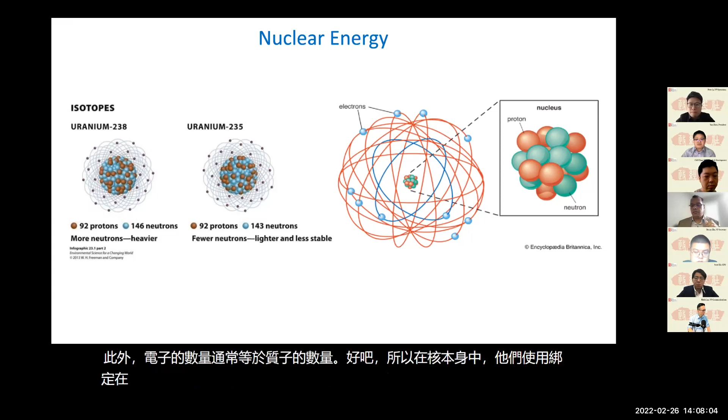In the nucleus itself, protons and neutrons are bound together using nuclear energy. We are going to manipulate that energy in two nuclear reactions. In general, there are two nuclear reactions known to us: one we call nuclear fission, and the other we call nuclear fusion.

In nuclear fission, what we do is break a uranium-235 atom using what we call slow neutrons.

The neutron is moving slow compared to fast neutrons. So what happens now is this neutron gets absorbed into a uranium-235 nucleus, it becomes unstable, then it splits into two, releasing energy as well as 2 to 3 neutrons. These neutrons will eventually travel through the medium, reduce its energy, and become available to continue with the next generation of fission.

So this fission reaction would continue as a chain reaction inside a nuclear reactor, generating energy. Eventually that energy would be transferred into electricity through mechanical processes.

So in nuclear fusion, isotopes of hydrogen, deuterium and tritium, are exposed to very high temperature and we combine them into helium as well as neutrons. Through that process as well, we can generate and release energy.

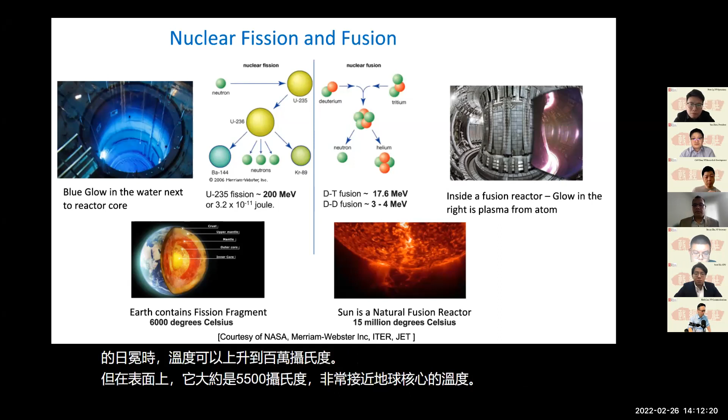When we look at the fission chain reaction closely, we have very slow neutrons coming and impacting the uranium-235 nucleus. When that happens, this uranium-235 becomes uranium-236, and it becomes so unstable that it's going to split apart. As it splits, it releases energy as well as neutrons.

Those neutrons would travel through what we call a moderator. The moderator is a region where you can slow down the neutrons to increase the probability of their interaction with another uranium-235 atom. Usually when neutrons are generated in a fission reaction they move very fast, but to increase the probability of interactions we need to slow them down using a moderator. Most nuclear reactors have a moderator.

Sometimes they use regular water, sometimes heavy water. In the CANDU technology that we use here in Canada, we use heavy water as the moderator. Then those slowed down neutrons will eventually interact with the nucleus and this chain reaction will continue.

As part of nuclear fission, you generate what we call fission fragments, which are the two elements that the original atom was broken apart into. They can come up as gas forms or as solid forms.

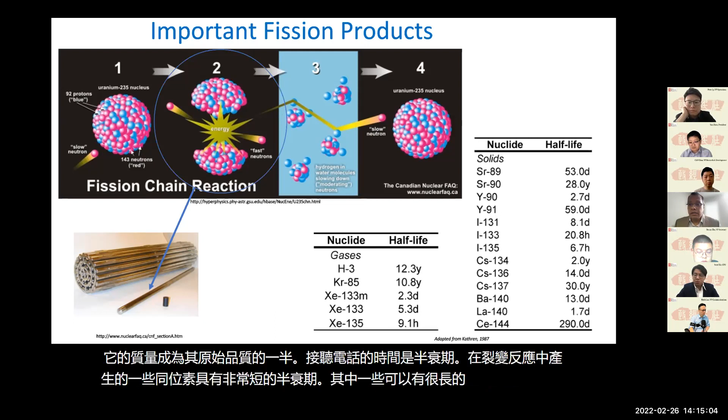When we look at the nuclear power plant distribution throughout the world, many countries do utilize nuclear energy, including Canada. Most of the nuclear power plants you find in the world are called pressurized water reactors, meaning the pressure inside is very elevated, on the order of 10 to 14 megapascals.

Enriched UO2 means that when you get uranium from the ground, usually called natural uranium, it has around 0.7% uranium-235, and the rest is around uranium-238. This is the fuel that we usually use in Canadian technology.

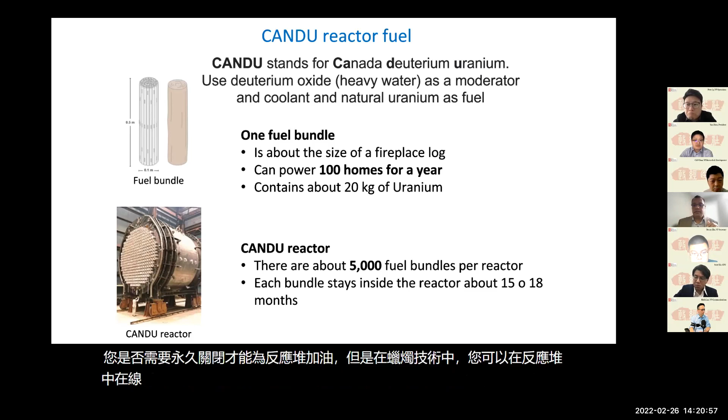So here is a close-up of a CANDU reactor. You can see this is a CANDU calandria. So when you look at a cross-section of this reactor, you can see a figure over here.

We have fuel channels. If you look at this little white thing that you can see here, this is like a channel that is going through calandria. Okay, this is the whole calandria, and this one channel is called a fuel channel.

Inside one fuel channel, you're going to come across around 12 fuel bundles, each one of which is around half a meter in length. So the total length of this is around 6 meters.

So when you look very close to the fuel bundle, you can see the surrounding area. This fuel bundle is inside what we call a pressure tube. The pressure tube, and outside the pressure tube, we call the calandria tube.

You can see there are different layers to keep the fuel integrity as well as the pressure inside this chamber. The pressure inside this chamber is at a very elevated level, which is usually maintained using the pressurizer attached to all these channels.

Outside this pressure tube, what you see in blue color is the moderator, where the neutrons that are being generated in the fission reaction will slow down to continue with the next generation of fission reaction.

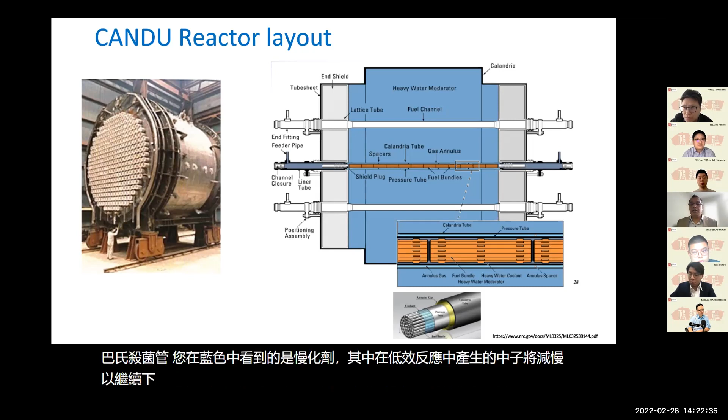So here's a comparison of nuclear power generation plants as well as coal-fired power generation plants. They both at the end generate electricity, but what you need to see is how it's being generated, what is being used to generate it, and what pollution is generated throughout this production of electricity for different means of power generation.

Just for comparison, I'm showing you on the left side a nuclear power plant, and on the right side a coal-fired power plant. In a nuclear power plant, we use nuclear fission to generate heat.

The heat that is generated in the interaction of the nucleus with the neutron would transfer into a coolant, which travels through these fuel channels, and from one end to the other, that heated coolant goes into a steam generator.

In the steam generator, the heat from the coolant is transferred into light water, which is regular water. This primary side and secondary side never actually touch each other; they are separated by metal tubes inside the steam generator.

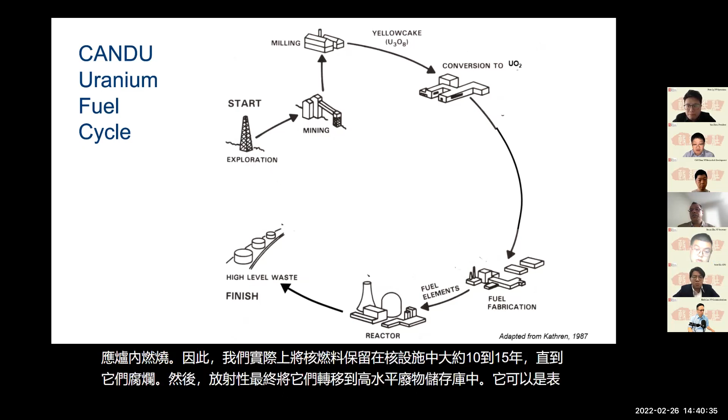When we come to nuclear radioactive waste, the waste can be generated at different levels. Some waste is generated using the mining and milling process, and then fuel fabrication waste, as well as nuclear reactor operations as the fuel is burned. The burn product will still have quite a bit of radioactivity in there, as well as radioactive isotopes generated as part of the fission reaction. So they can be highly radioactive, and you need to dispose of them accordingly.

Also, some of the product can come from nuclear research facilities such as universities, TRIUMF, and all those facilities. And some are coming from radioisotope manufacturing processes, as well as medical applications. Some of the isotopes used for chemotherapy or other medical applications can be waste as well, and we need to find a way to dispose of them properly.

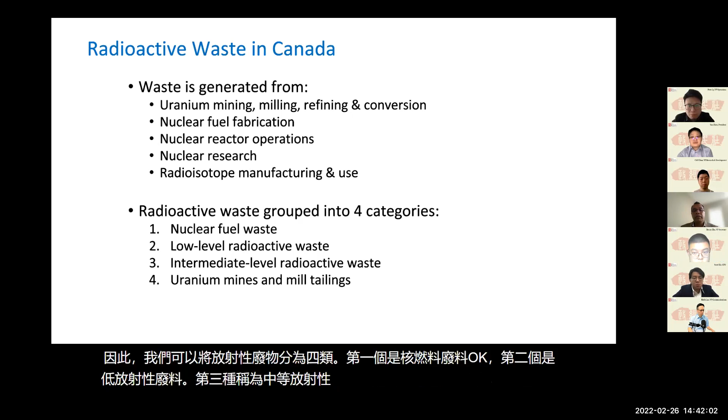So we can categorize radioactive waste into four categories. First one is the nuclear fuel waste. The second one, low-level radioactive waste. Third one is called intermediate level radioactive waste. And the fourth one is uranium mines and mill tailings.

When it comes to most old nuclear power plants that are being decommissioned, they usually keep the waste in the facilities itself. Some of the low waste we can send to facilities like Chalk River nuclear facility, or maybe Montreal or Brampton. At a university level, our students use very small radioactive sources, which we call button sources, in the microcurie range. A curie is a measurement we use to measure radioactivity.

Then some of the high-level radioactive waste we actually store in the nuclear reactor itself, underwater in tanks like this. Most of the time the waste is transferred underground into underwater facilities like that. They keep it in those tanks for around 10 to 15 years, until we take it out and send it to deep geological repositories or long-term facilities.

This is usually done here in Canada by the Nuclear Waste Management Organization, NWMO. They have long-term storage facilities, and they're also planning geological repositories, so we can send the waste into a very deep location of the earth and store it inside concrete bunkers. They are going to follow a process called adaptive phased management, and right now they are looking for a suitable site for this deep geological repository.

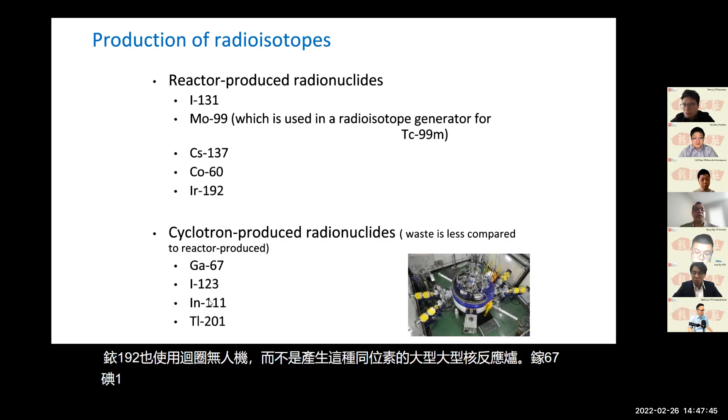Some of the isotopes that are produced include iodine-131, molybdenum-99, which is used for radioisotope generators in our labs. We generate cesium-137, cobalt-60, mainly used for food irradiation, and iridium-192. Also, we use a cyclotron, not a big huge nuclear reactor, which generates isotopes like gallium-67, iodine-123, indium-111, and thallium-201.

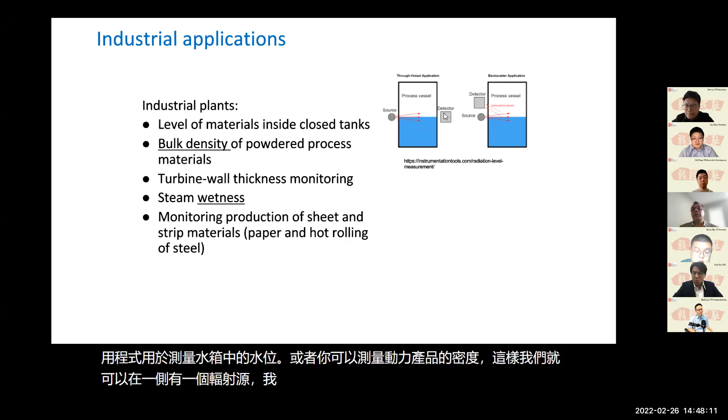Where can we use these isotopes? Sometimes for so many industrial applications. Some applications are to measure the level of water in tanks, or to measure the density of a powder product. We can have a radiation source on one side and a detector on the other side, and based on the readings, you can determine the density or the level of the water.

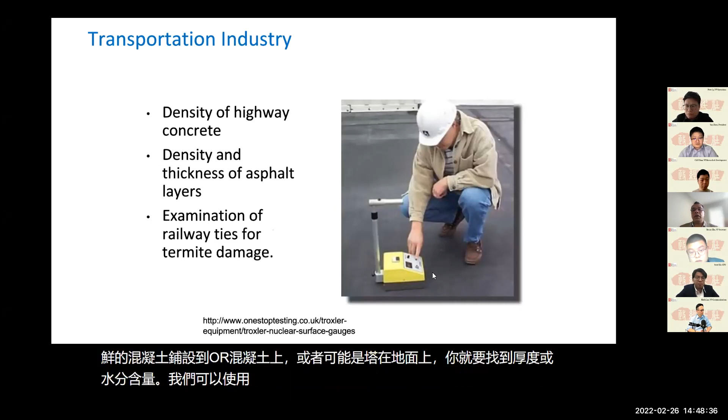Also, we use radioisotopes in the transportation industry. Once we lay fresh concrete or tar onto the ground, if you want to find the thickness or the moisture content, we can use a Troxler gauge, like the one shown here in the picture. So there's lots of application in the industry.

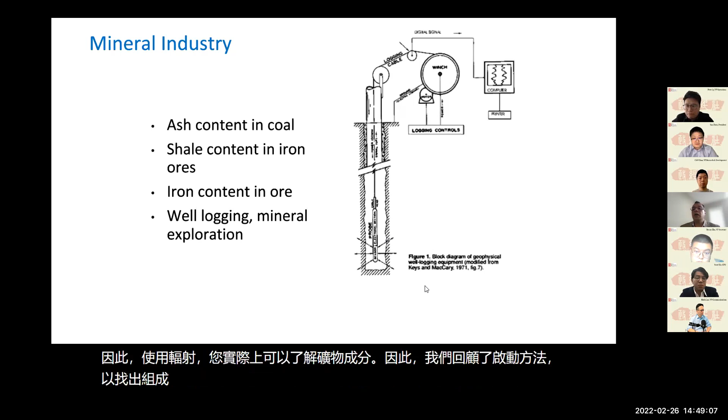Another application is to find out mineral explorations. You dig a hole, maybe 200 or 300 feet, or 200 or 300 meters down, and you want to find out what elements are there. Using radiation, you can get an idea about the mineral composition. We use what we call activation methodology to find out the composition, because there's no way you can actually go down and measure what is available down there.

Also, sometimes for the agricultural industry, we use radioisotopes to find the thickness or density and how the growth is happening. Also, in the forestry industry, if you want to find the thickness of the wood and how the intake of plants is happening from the soil all the way to the trees, we can use radioisotopes.

The other application would be for non-destructive testing. If you want to see something inside a metal using non-destructive testing methodologies like ultrasound, we can use radiation to look for internal cracks or surface cracks. If I weld pieces together and want to find the integrity of the weld, I can use gamma rays or X-rays. So there are lots of applications from these isotopes that are generated in the nuclear reactor or in a cyclotron.

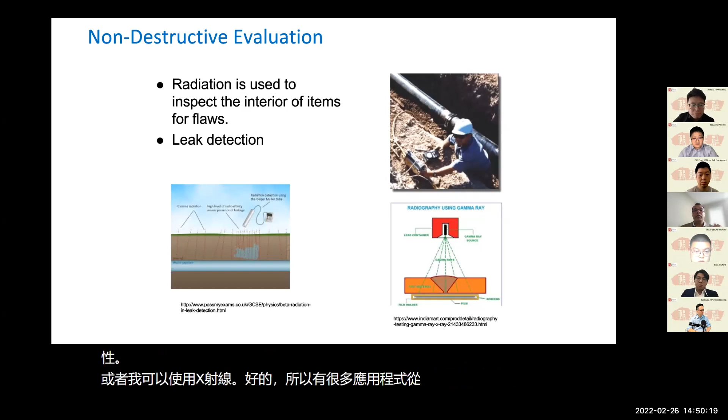Medical applications - Canada being one of the pioneers in inventions of some radiation therapies - have been used for so many applications. Iodine-131 is used for thyroid imaging, and Technetium-99 is used for cancer and heart disease diagnosis.

Xenon-133 is used for lung functioning. So there are lots of isotopes being used on a day-to-day basis in our medical field. These are being produced in a nuclear reactor or in a cyclotron facility.

Also, to sterilize medical supplies, like a lot of stuff that is contaminated by human blood or saliva, can be sterilized using big sterilizers that use cobalt-60 radiation sources.

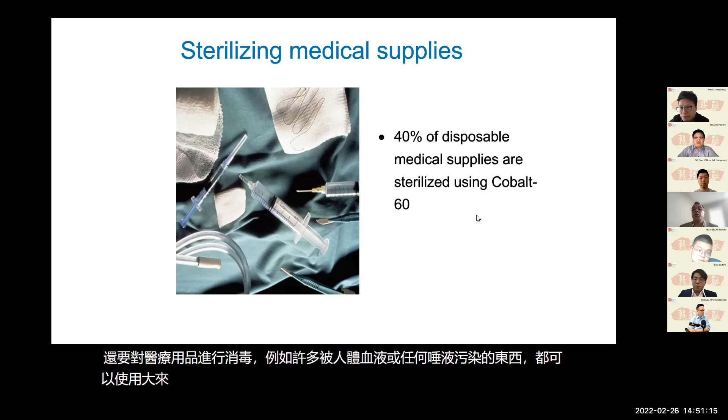Also, food irradiation. Most meat products, or wheat, potatoes, can have lots of bacteria or other contamination in them. So we can use radiation to basically kill them before we consume them. This is done in Canada all the time, as well as the US and many other countries throughout the whole world. Food irradiation is one of the big things that's been utilized.

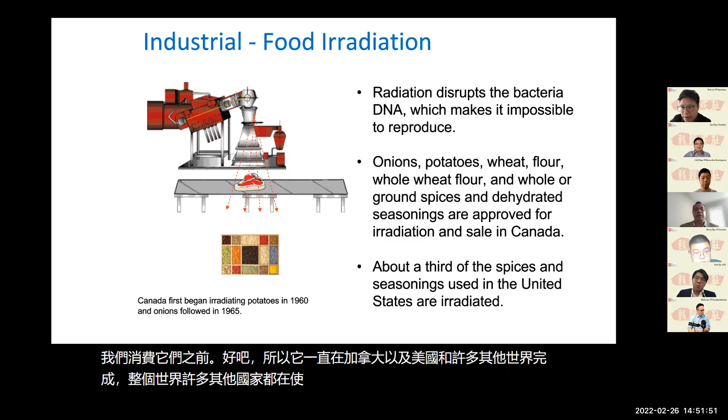Finally, I'd like to talk a little bit about the potassium iodide pill. If you are living in close proximity, around 10 kilometers, to a nuclear power plant, you'll be given a potassium iodide pill. You need to take it when the chief medical officer or someone has announced a radiation incident or accident — don't take it until that time. If someone actually says over the radio, TV, or through the siren that people need to take the potassium iodide pill, you should take it as soon as possible.

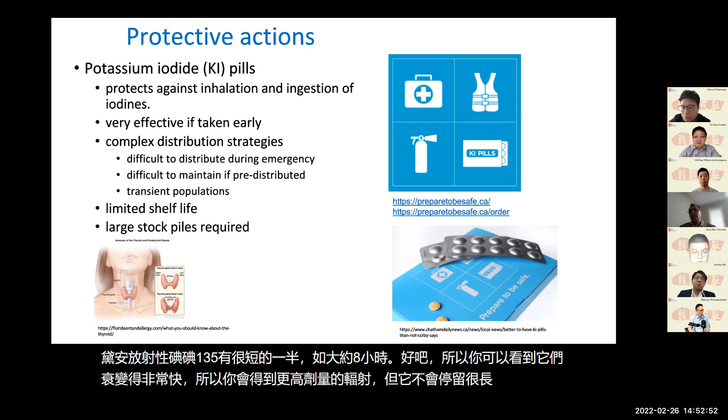The sooner it's taken, the better, because radioactive iodine, iodine-135, has a very short half-life, around 8 hours, so it decays very quickly. You get a higher dose of radiation, but it won't stay a long time because of that 8-hour half-life. So it's very important to take your potassium iodide as quickly as possible, from the time the accident happens.

That way, your thyroid will be saturated using non-radioactive iodine. Once it's saturated, when you inhale or ingest radioactive iodine, it won't go to your thyroid — it will just pass through your system, going out through your urine or other means. It will not stay inside your body. But this is only for radioactive iodine.

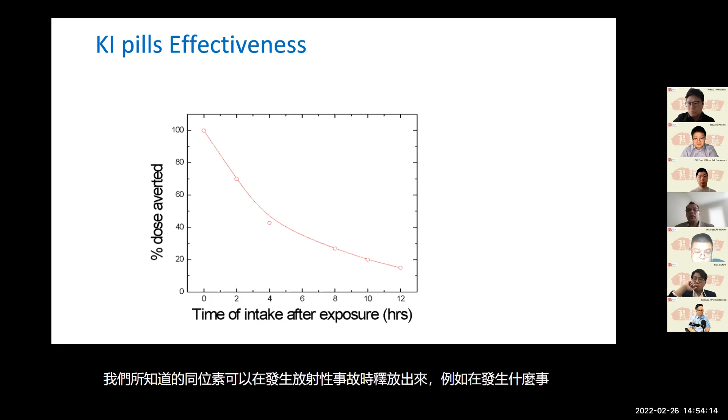There can be other radioactive products released in the event of a radioactive accident. Cesium-137 is one of the culprits — it usually mixes up with food products because it can easily get into your food chain. There can also be strontium. Those are some of the isotopes known to us that can be released in an event of a radioactive accident, such as what happened in Fukushima, Chernobyl, or Three Mile Island in the past.

In regular operation of a nuclear power plant, the environment is constantly monitored, because some radioactive gases can be released into the environment at very low levels as part of regular operation. When designing a nuclear power plant, scientists work with health physicists to come up with numbers we call derived intervention levels, or DILs, based on a critical group.

For example, if we have a nuclear power plant in Pickering, we pick a probable location based on the direction of the wind and where the water is going — a probable location where people can get a higher dose of radiation. We consider that location as the critical group. Usually the group is selected based on their activities and the food they consume. So we do design work to find out the maximum level those people can get, in order to not exceed the regulated levels.

Based on that, we issue a license for the nuclear facility, and the Canadian Nuclear Safety Commission regularly monitors how much they are releasing into the environment. All those levels have to be much lower than the derived intervention levels of those radioisotopes. It's strictly monitored and controlled by CNSC for all facilities here in Ontario and throughout Canada. In other parts of the world, it's done by the local regulatory body under IAEA.

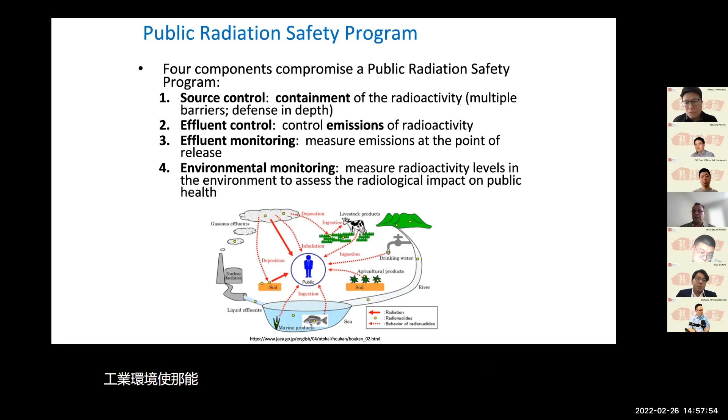So that will actually bring us to the end of our presentation. I will open up the floor for questions.

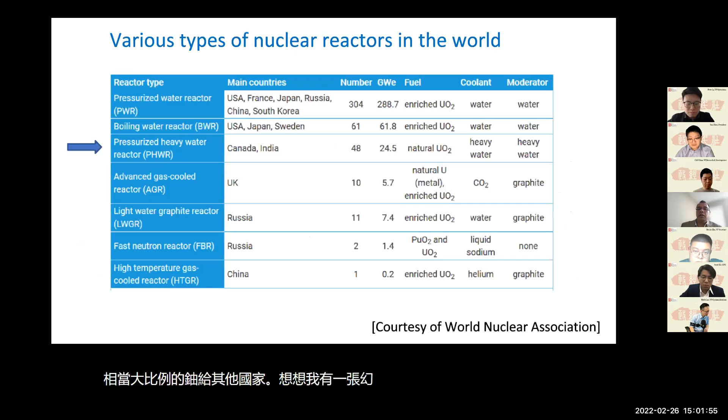Okay, that's great. Now that comes to my second question. I think a lot of Canadians would like to know this, especially people in Ontario. If we are self-sustainable in uranium and do not need to buy any from other countries, is this the solution to help save our electricity bills in the long run if we keep developing and building nuclear power plants in Canada or in Ontario?

You have to consider the generation of electricity in a bigger picture. It's not just the dollar figure attached to how much is the kilowatt, but you also have to think about the emission to the environment and how that's going to affect our lifestyle. When you capture all of that together in one picture, the best way to achieve a low carbon future is to basically go with nuclear energy.

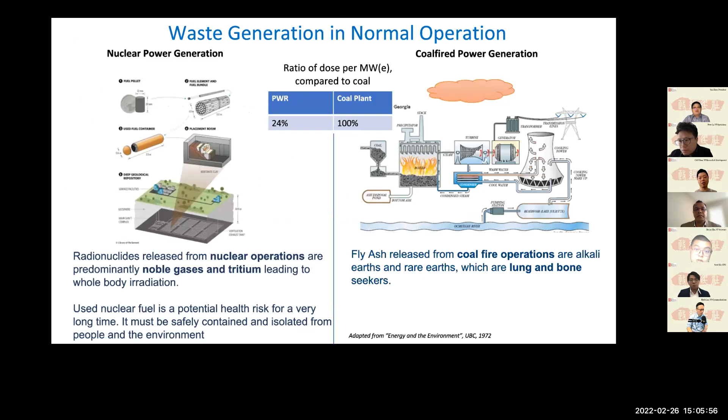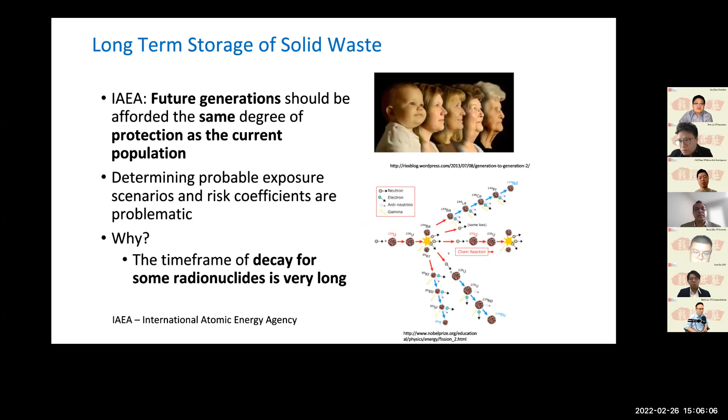Are there any tests done in the past to confirm that these two power plants are totally safe to be operated?

As you can see here, we have Darlington and Pickering nuclear power plants, and they were intentionally put close to Lake Ontario. The reason is we are using the Lake Ontario water to cool down the water coming out from this turbine. When you look at the nuclear power plant operation here, the water coming from the lake is coming from the bottom tube. Can you guys see? This is where it's connected to Lake Ontario.

The water never actually touches the radioactive part of the reactor, but there can be some minor leaks as part of regular operation that can get into our waters, though these levels are very minimal. So what we release into the water is minimal, and what we release into the air, we don't usually release any gases compared to when we are using fuel into the air and atmosphere.

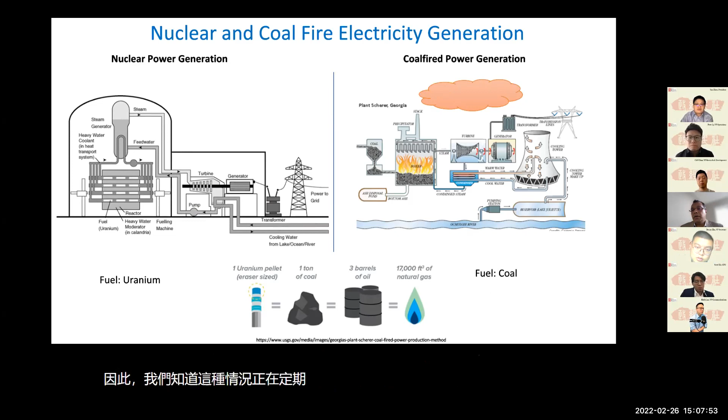We know this is happening in regular operation of a nuclear reactor, but how can we make sure? What we do is we have a lab here in Whitby, called the Health Physics Lab for Ontario Power Generation. Their goal is to collect samples throughout the whole of Canada—water samples, air samples, soil samples—and measure them on a daily basis. They even pay people to go catch fish and bring them to the lab, and look into those fish regularly to see the radioactive content. They publish this data, and it's available for the public to look at.

Pickering has been there for almost 40 years, and Darlington is going now 25 years. We have been operating in a very safe manner, and people have been living very close to nuclear power plants—if you go to Pickering, you can actually see them. We have been running in a very safe manner, and the nuclear power plant technology itself has inherent safety protocols built into it, to make sure not only the people are protected, but also the environment and non-human biota are protected as part of regular operation of nuclear reactors.

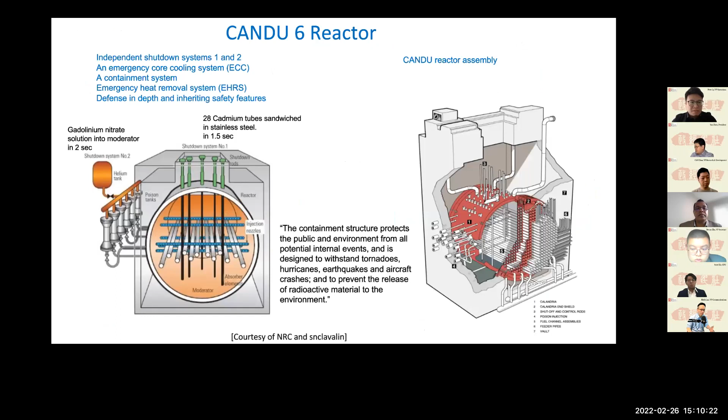Thank you so much, Professor Perera, for the very detailed presentation today. I'm from the media, so I've been writing about recent BBC news discussing nuclear waste disposal, with a plan by the Canadian nuclear industry's Nuclear Waste Management Organization to build a disposal facility in Ontario, either South Bruce or Ignace. One is a small town west of Toronto, near Mississauga, kind of far west.

Another is even further in the northwest territory of Ontario. The facility is really huge, really deep down, like a CN Tower height deep storage facility for used nuclear rods. There are some concerns from residents of the small towns worrying about water contamination, but the Canadian nuclear industry has assured that the facility is top quality and very safe. So can we get some insight from you about such a large nuclear waste disposal facility and the safety concerns, please?

Earlier I showed you a picture about the plan. The Nuclear Waste Management Organization, also called NWMO, has a plan called the Adaptive Phased Management Plan. As you mentioned, they proposed many facilities for this deep geological facility, and finally narrowed it down to two. They are looking into what is the best place to put it.

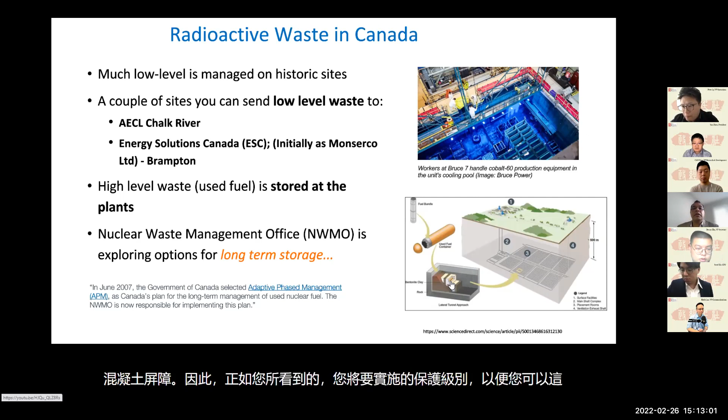Okay, so can I play this video? Do we have time? Can you see my screen and the video? Yeah. So this is a video put out by, sorry, NWMO I think, just to show them, if I'm not mistaken.

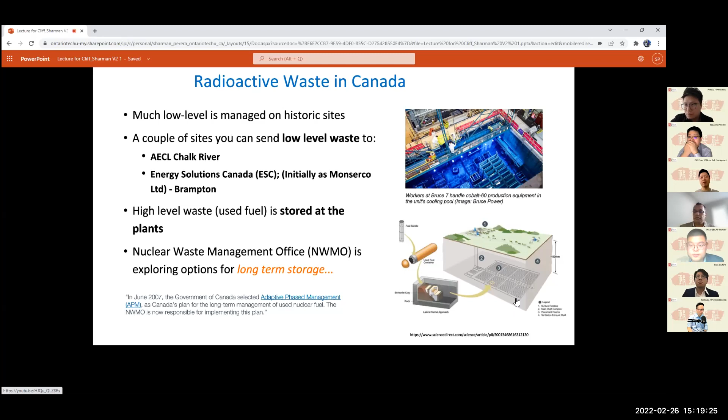Okay Cliff, go ahead. You just mentioned about the potassium iodide pills. I believe this is mandatory now for everyone who lives or works within 10 kilometers proximity of the nuclear power plant to have such pills stored at home or at work. What if people just move into the area and would like to have a case of pills? Where can they contact, and what authority is responsible for distributing the KI pills?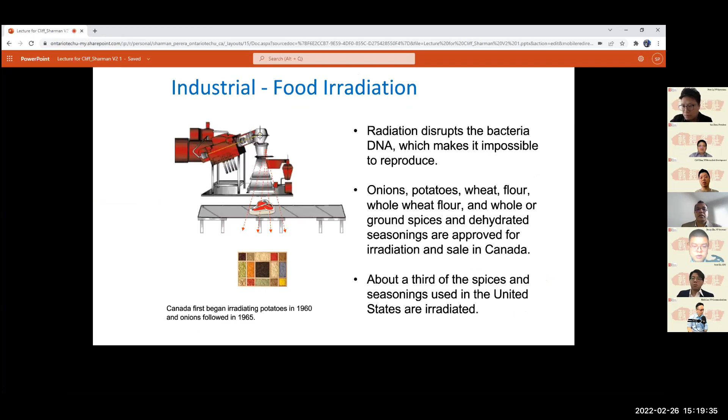Okay, good question, and a useful question. If you are living close to the proximity of a nuclear power plant, based on instructions given by the Canadian Nuclear Safety Commission, they started distributing these pills if you are living within a 10-kilometer radius from a nuclear power plant. So if you haven't gotten the pills, you can actually go to this website—let me click on the website.

And then it will open up the preparetobesafe.ca website. You can get lots of information about what the potassium iodide pill is, and why am I receiving this now? What does it do? When should I take it?

It's showing you based on your age and whether you're pregnant or not, how much you need to take. Are there any side effects on those pills? What is included in the KI pill package? And where should I store them? If it's not enough for my family, where can I get it from?

You can actually go into an online form, click on that, and then say what kind of business you have. If I say home, then you fill this application form and submit it, and they will send you the pills. Also you can go into a local pharmacist, or other locations. This list also tells you how you'll be notified. As I said before, they will notify you through television or some sort of media asking you to take the KI pills.

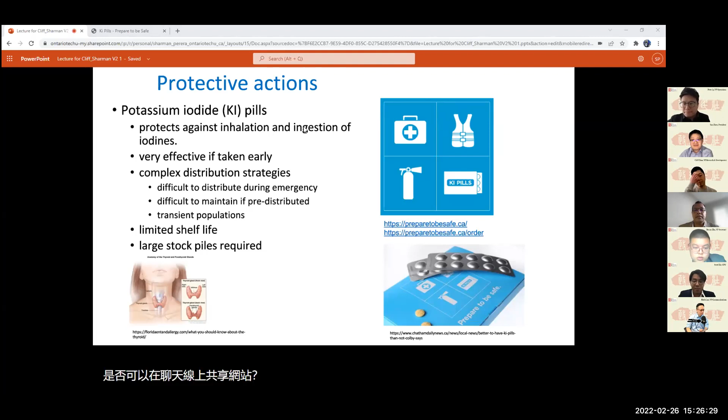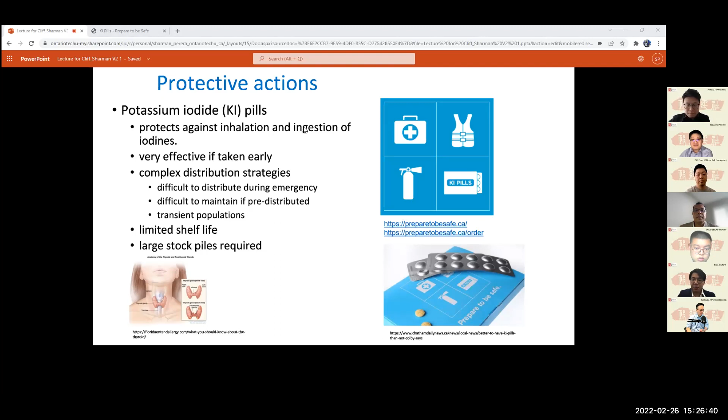Thanks so much, everyone. Thank you. Thank you. All right, take care.